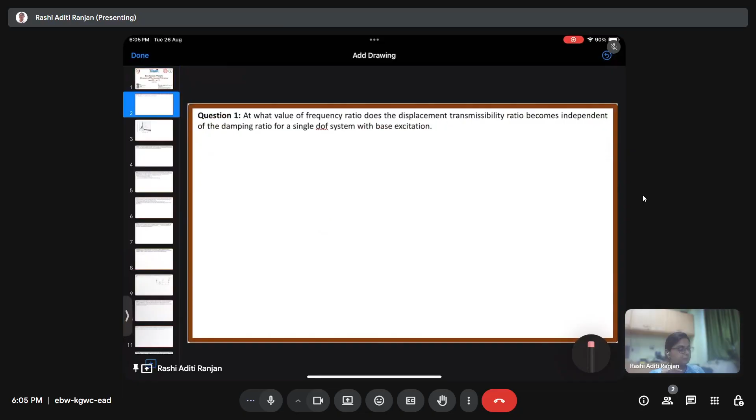Coming on to question number 1: at what value of frequency ratio does the displacement transmissibility ratio become independent of the damping ratio for a single degree of freedom system with base excitation?

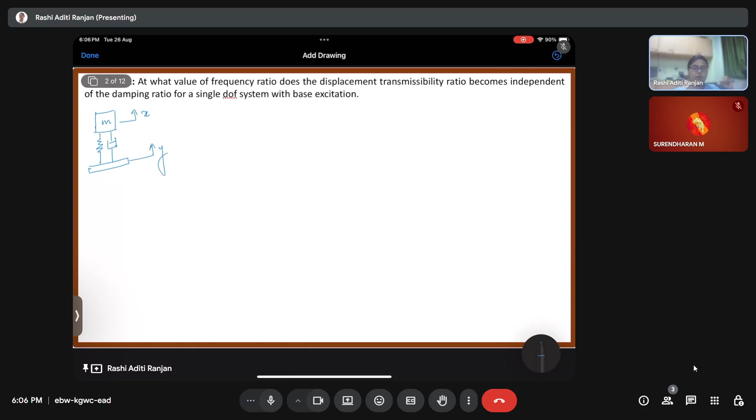The question is about a single degree of freedom system, which is a mass, spring, damper, and then this is the base. If this mass is having a displacement x, the base is having a displacement y, this is a single degree of freedom system with base excitation. The base y can be written as y naught sine of omega t. Let this be k and c.

So the question is about displacement transmissibility ratio, and when does it become independent of the damping ratio? Firstly, damping ratio eta is nothing but c by cc, and we have cc as twice the square root of mk.

Also we have omega, which is the excitation frequency, and omega n, which is the natural frequency of the system. We define the frequency ratio r as omega by omega n.

So the displacement transmissibility, which is x by y: x is such that if we write the solution x as x sine of omega t minus phi, then this ratio of x, the amplitude of the response of my mass, to y, the amplitude of the displacement excitation, is defined as x by y equals square root of [1 plus (2 eta r) squared] divided by [(1 minus r squared) squared plus (2 eta r) squared]. This is the equation for displacement transmissibility ratio.

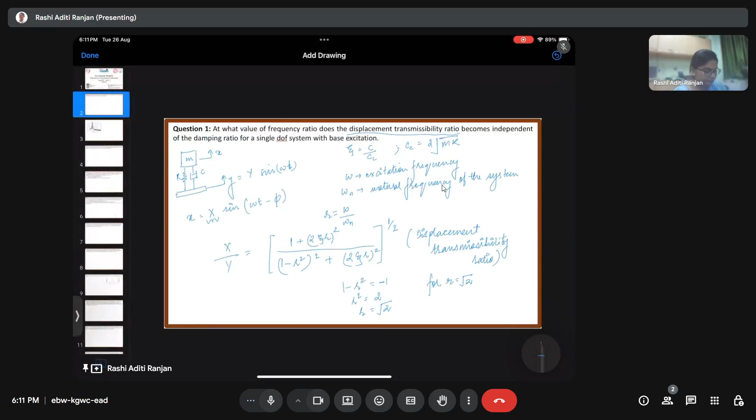For r is equals to under root 2, we have X by Y is equals to under root of 1 plus 2 eta under root 2 square, divided by 1 minus 2 whole square plus 2 eta under root 2 square. This will give us 1 plus 8 eta square divided by 1 plus 8 eta square, which gets cancelled, giving us X by Y is equals to 1.

More than that, what is important is that whatever be the value of eta, we are always going to get the value of transmissibility ratio as 1. It becomes independent of the value of eta, which is the damping ratio.

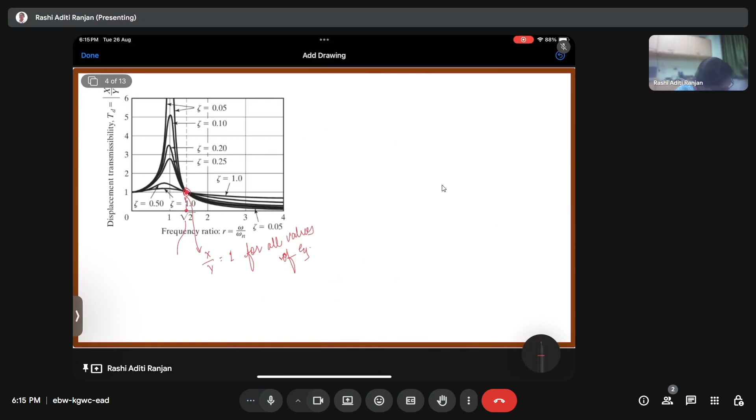Along with that, you can observe over here that at this point, what is happening? X by Y is equals to 1 for all values of eta, and this is happening at R is equals to under root 2. So you can see from the graph as well that this is true. For the frequency ratio under root 2, we get a constant value of displacement transmissibility, independent of the value of eta.

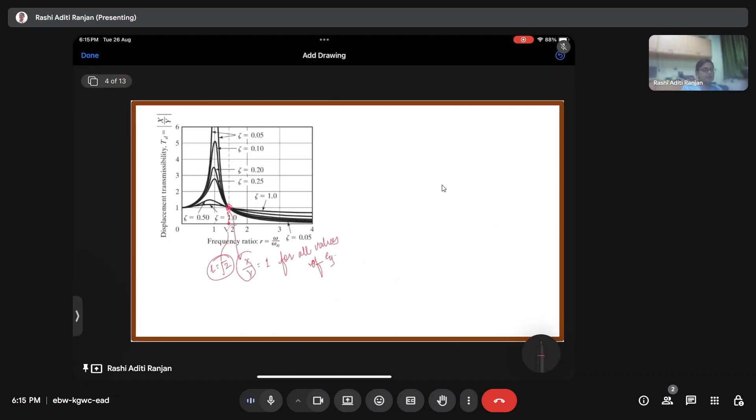So for the given question, which asks at what value of frequency ratio does the displacement transmissibility ratio become independent of the damping ratio for a single degree of freedom system with base excitation, the answer is omega by omega n, r is equals to under root 2.

Now coming on to question number 2. This again is a question about base excitation, where the base has some displacement excitation. It says a vehicle can be modeled as a single degree of freedom system with mass 1200 kg, stiffness 400 kilonewton per meter, and damping ratio 0.5. If the vehicle is traveling on a road with sinusoidal profile having amplitude of 0.05 meter and wavelength of 6 meter, with a speed of 20 km per hour, find the amplitude of vertical vibration of the vehicle.

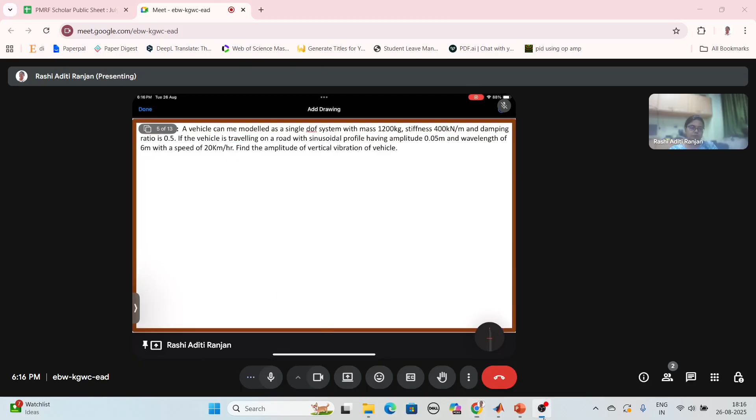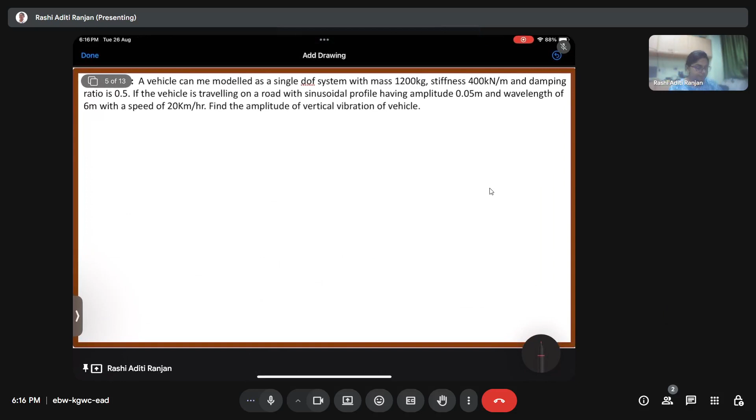So we have a vehicle such that this is the mass of the vehicle. It has a stiffness of 400 kilonewton per meter. There is a damper such that the damping ratio eta is equals to 0.5. And since it's a vehicle, it is going to have some tires. Let us say these are the tires.

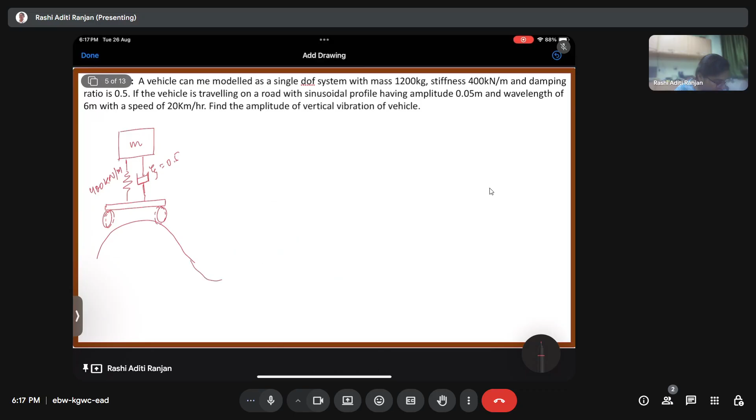And it is traveling on a road. The road is such that it is having a sinusoidal profile, and it has a wavelength lambda is equals to 6 meter. Now the forward speed of this vehicle is 20 kilometer per hour.

And we have to find the amplitude of vertical vibration. If let us say that this is something like x cos of omega t minus phi, then we have to find the value of this x.

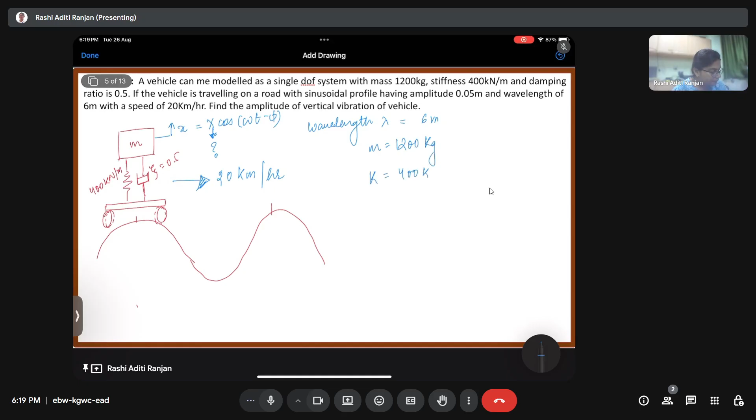Okay, we have to find the value of this. Now in the question, we have the mass, stiffness, damping ratio, forward speed, just 20 kilometer per hour. Then we have wavelength lambda. Okay, it is already written wavelength. So these are the specifications that we have.

So the first thing is, even if I want to apply the equation that we have for the displacement transmissibility, it is x by y is equals to square root of 1 plus 2 eta r whole square divided by 1 minus r square whole square plus 2 eta r whole square, to the power 1 by 2.

So I have the value of eta, but I need to find out the value of r, which is omega by omega n. So I don't have directly the values of omega and omega n, but I have the necessary data in order to find out the values of omega and omega n. So first we'll calculate omega n.

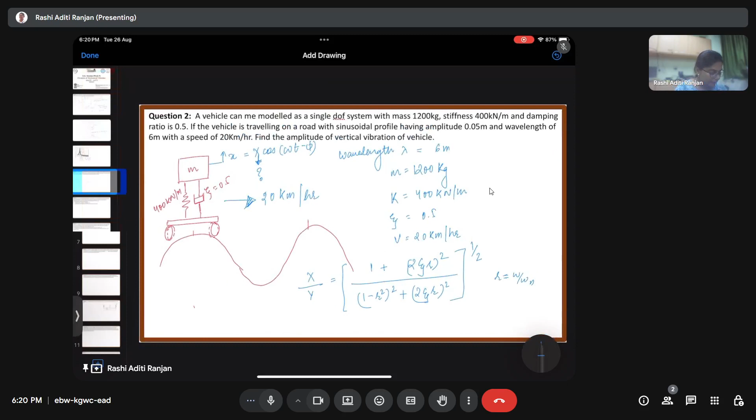So for a single degree of freedom system, we have the natural frequency defined as under root k by m, which is 400. It was 400 kilonewton. So 400 into 10 to the power 3 divided by mass, which was 1200. If you calculate this, it gives the value of omega n as 18.257 radians per second. This is the value of omega n, the natural frequency.

Now, if I see the value of omega, if I would have had the value of frequency f, I can find the value of omega by the equation 2 pi f. But how do I find the value of frequency f? In order to find the frequency, if I have the wavelength and I have the speed, if you remember when we study about waves, we have this equation f is equals to v by lambda, where v is the wave speed and lambda is the wavelength. So if I have these two values, I can find the value of f.

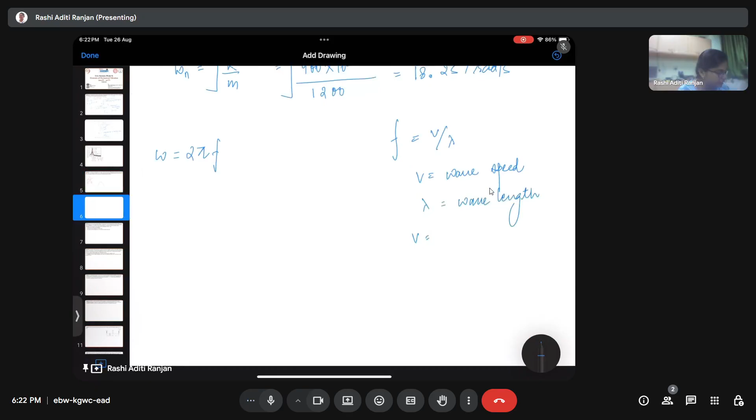Now over here, we don't have the wave speed, but instead we are going to use the vehicle speed, because the vehicle is traveling on that road which has a wavelength of lambda. So that speed of the vehicle is going to be used in order to find the value of frequency f. This v is given in kilometer per hour, so we can write v as 20 kilometer per hour. This can be written as 20 into 1000 meter, and then per hour is 60 into 60, 60 minutes 60 seconds.

So if I put this over here, 2 pi into 20000 divided by 3600 into 1 by 6. After doing all the calculations, this will turn out to be 5.81778 radians per second.

So we are going to get r as omega by omega n, which will be 5.81778 divided by 18.257. And when you calculate this, it will turn out to be 0.318653.

So when I put these values in the displacement transmissibility equation, I get x by y. I'll write the equation again: square root of 1 plus 2 eta r square divided by 1 minus r square whole square plus 2 eta r, to the power 1 by 2. It will turn out to be 1 plus 2 eta times r, which is 0.318653 squared, divided by 1 minus 0.318653 squared whole square plus 2 eta times 0.318653 squared, whole to the power 1 by 2.

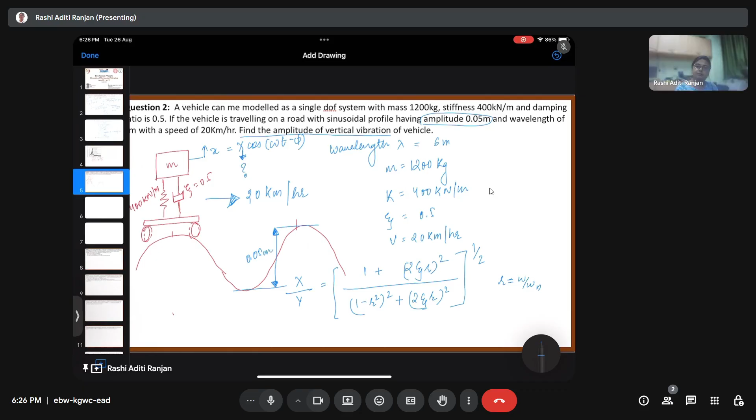However, in the question, it is asking to find the amplitude of vertical vibration. If you look over here, we have the amplitude of the sinusoidal profile as 0.05 meters. So we have this value as 0.05 meter, which is nothing but y. Now, since I have the ratio of x by y, I can simply write the value of x as 1.100964 into 0.05, which will give 0.055048 meters.

So this is the amplitude of vertical vibration of the vehicle. Okay.

So I hope this is clear. Coming on to question number 3.

Question number 3 says a heavy machine weighing 3000 Newton is supported on a resilient foundation. The static deflection of the foundation due to the weight of the machine is found to be 7.5 centimeter. So the weight of the machine is 3000 Newton, and we have delta static as 7.5 centimeter. Delta static is nothing but the static deflection of the foundation.

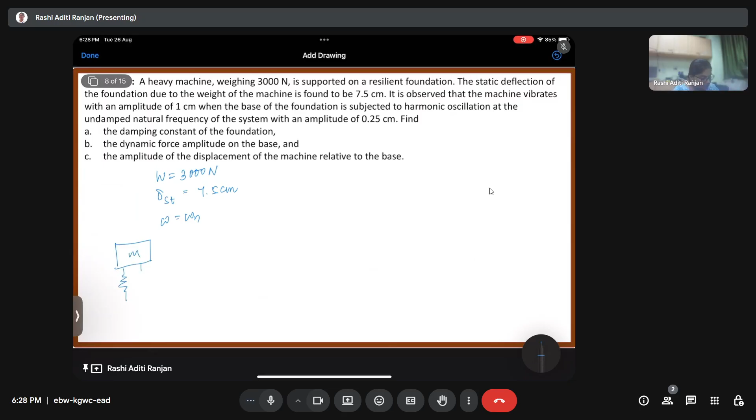Firstly, omega is equals to omega n. Let us say that this is a machine, m, then it is supported something like this to the base, with damper C and spring K. The base is oscillating as y sine of omega n t, because omega is equals to omega n, and we have the value of y as 0.25 centimeter.

And the machine is oscillating as x, which may be written as x sine of omega n t minus phi, where x is 1 centimeter. So firstly, we have taken the response of x as capital X sine of omega n t minus phi, because the mass is going to oscillate at the frequency at which the base is exciting, right?

Now the base is exciting at omega n. We have a damper, because of which the transient, which is due to the natural frequency of the system, is going to die out with time, and we are concentrating only on the steady state vibration of the system. So this is the case.

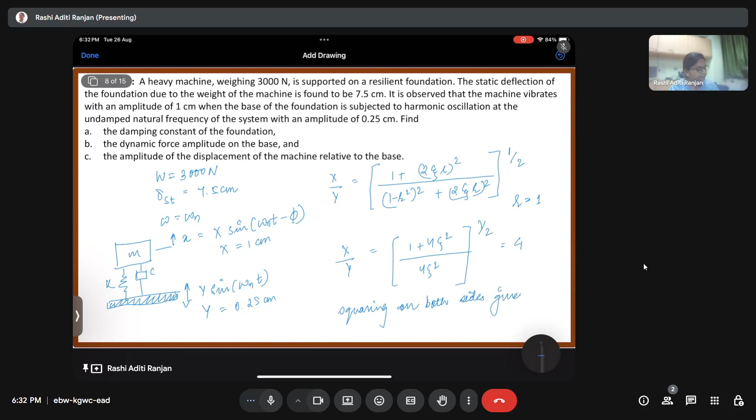Now if I put the values of capital X and capital Y, I get this as equal to 4. Squaring on both sides gives 1 plus 4 eta square divided by 4 eta square is equals to 4 into 4, which is 16. This implies 1 plus 4 eta square is equals to 64 eta square, or 60 eta square is equals to 1. This implies eta is equals to under root of 1 by 60. This value will turn out to be 0.1291.

This gives the value of the damping ratio. But in the question, we are supposed to find out the damping constant.

Now we know that C is equals to eta into Cc, and Cc is nothing but twice of under root of m into k, right? So we have twice of under root m, and we have a mass value of 3000 divided by 9.81, and then we have the stiffness K.

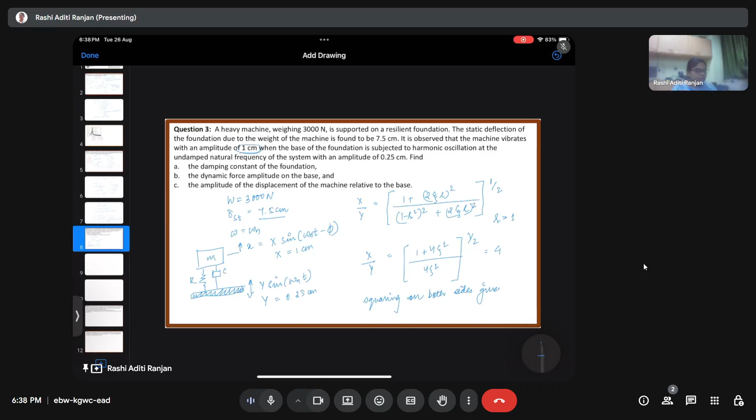So if we put these values over here, we get f of t as 40,000 into 1 by 100, which will turn out to be 400 Newton. This is the answer to part B.

So 400 Newton is the force that is being applied on the base. It is the force that is being applied on the base.

Now part C asks for the amplitude of the displacement of the machine relative to the base. So when we say relative to the base, we are talking about Z, which is nothing but X minus Y. So if we write an equation in terms of Z, which is the difference between X and Y, this is basically the relative value of X with respect to Y.

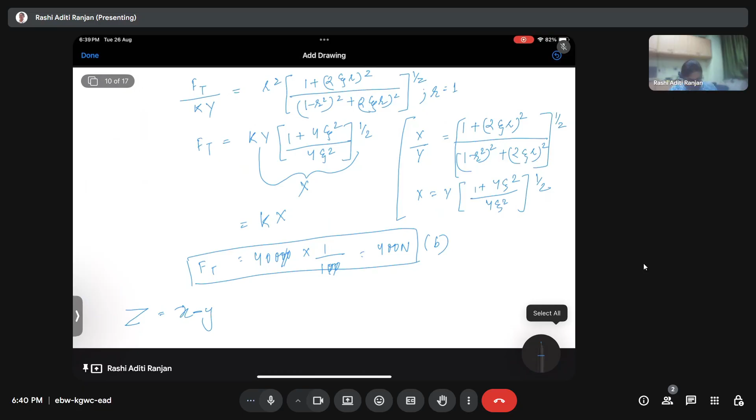Now if we use this and find the equation of motion and then use it to get a solution, we are again going to get a relation in the form of an equation such that Z equals capital Z, again amplitude. Capital Z equals y into r square, divided by the square root of 1 minus r square whole square plus 2 eta r whole square, right?

Since r equals 1, what do we get? We get z equals y divided by twice of eta.

The value of y we already have in the question, which is given as 0.25 centimeters. So 0.25 divided by 2 into 0.1291 into 100. This will give the value 0.00968 meter, and this is the answer to part C. Okay, I hope this is clear.

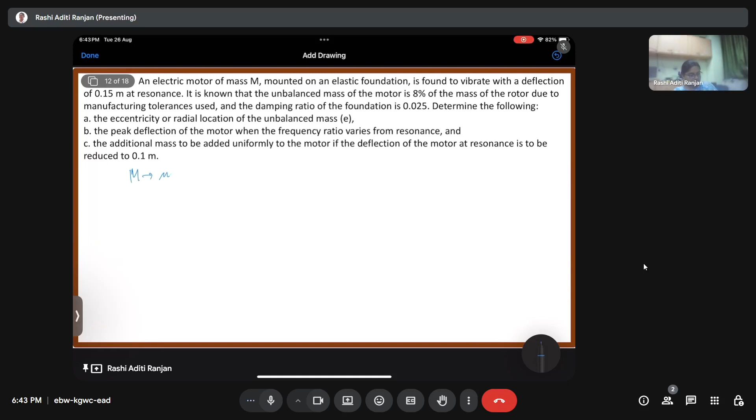See, our system is something like we have the motor mass as m. It is mounted on an elastic foundation, and deflection is 0.15 meter at resonance. Okay, deflection of what? Deflection of the motor mass, right? It is found out to be 0.15. So we have x as 0.15 meter. It is known that the unbalanced mass of the rotor of the motor is 8% of the mass of the rotor.

M is 8% of rotor, which is equal to 0.08 of M, right? The damping ratio of the foundation is 0.025. First, we have to find the eccentricity or radial location of the unbalanced mass.

So, if you remember, for eccentric mass, the transmissibility ratio was given in the form such that mx by me was equal to r square divided by the square root of (1 minus r square) whole square plus (2 eta r) whole square.

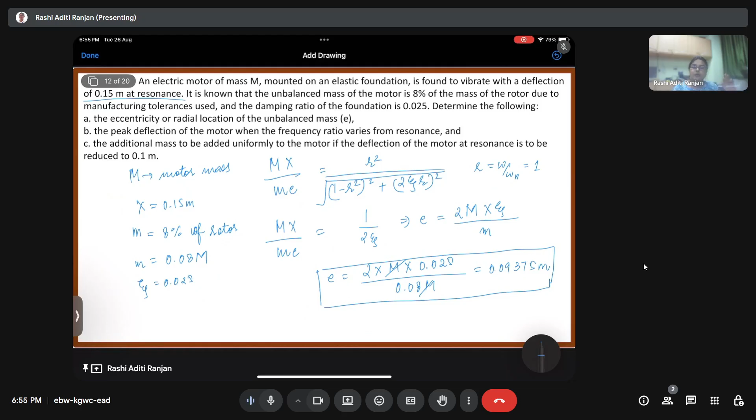Coming on to the third part of the question, which asks for the additional mass to be added uniformly to the motor if the deflection of the motor at resonance is to be reduced to 0.1 meter. Currently the deflection at resonance of the motor is 0.15 meter. But now the question says if I want it to be 0.1 meter, what should I do?

Adding another slide: we have the equation of the form mx by me is 1 by 2 eta, for r equals 1, that is the resonance. Now we have to replace m by m plus ma, which is the additional mass. So the question asks what should this additional mass be such that capital X changes from 0.15 meters to 0.1 meter. We are going to put all these values and find m plus ma.

So we'll have the new equation as m plus ma into 0.1 by 0.08 m into e is going to be 1 by 2 into 0.025, which is going to be 20. The value of eta was 0.025.

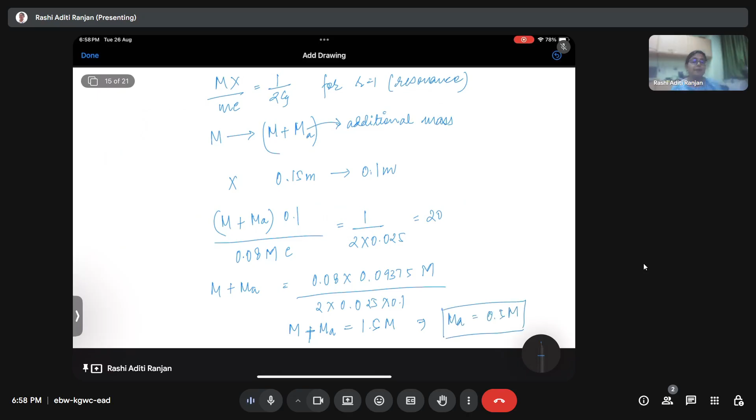So m plus ma will be equal to 0.08 into 0.09375 divided by 2 into 0.025 into 0.1 m. After doing all the calculation, m plus ma is going to be 1.5 m, and so ma is going to be 0.5 of m. So almost 50% extra of capital M, which is the mass of the motor, should be added to the motor so as to get a deflection amplitude of 0.1.

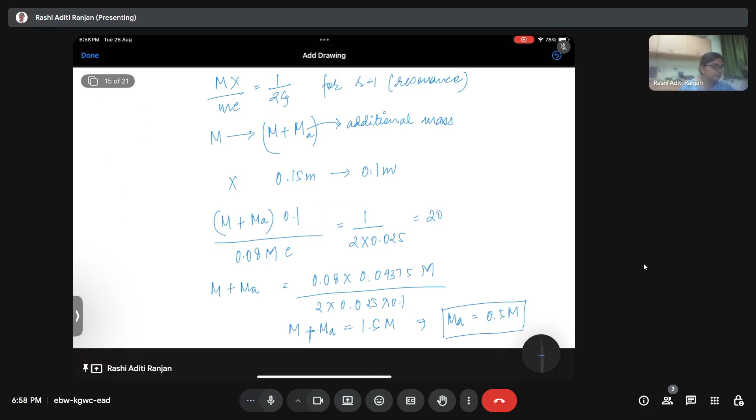Now coming on to question number 5, which says that for a spring mass system, the mass is 10 kg and the spring stiffness is 4000 Newton per meter, vibrating on a horizontal surface. A coefficient of friction is 0.12. When subjected to a harmonic force of amplitude 98 Newton and a frequency of 2 Hertz, the mass is found to vibrate with an amplitude that we have to find out. Then we have to find the limit of amplitude of the force to get a real value of amplitude of vibration.

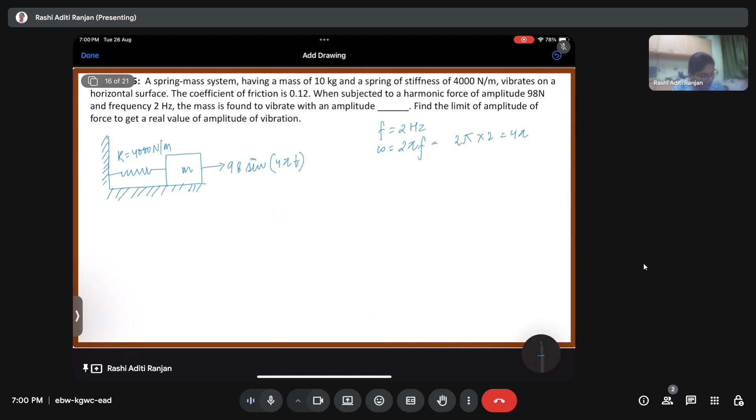So the question is something like: you have a mass m, and then there's a spring which has a stiffness of 4000 Newton per meter, and it is having a forcing of 98 sine of omega t, where F is 2 Hertz. So omega is 2 pi F, which is 2 pi into 2, equals 4 pi. And here there is some friction such that mu equals 0.12. So we have to find out, if this mass is oscillating, what is the amplitude of oscillation of the mass?

So firstly, for this kind of system, what relation do we have? Up till now we were dealing with a system wherein forcing was there along with viscous damping. Here we have coulomb damping. There has been a derivation of the transmissibility ratio for coulomb damping, and it turns out that x is given in terms of f naught by k into 1 minus 4 mu n by pi f naught whole square, divided by 1 minus r square, whole to the power 1 by 2. Mu is the coefficient of friction, capital N is the normal force, and F naught is the forcing.

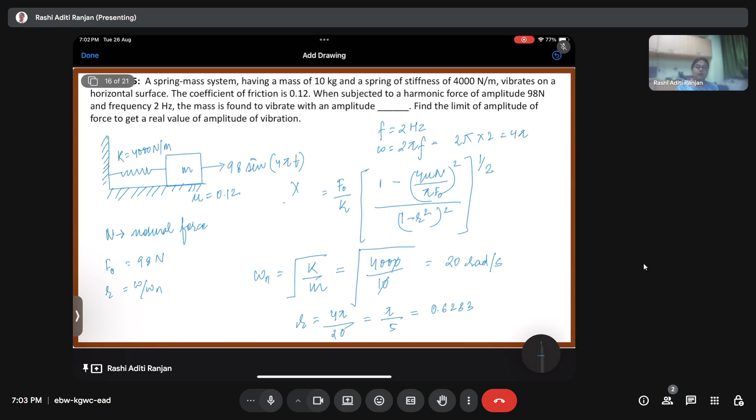Okay, now if I put all these values, I get capital X as 98 by 4000 into 1 minus 4 into 0.12 into capital N. Capital N is the normal force. We know the mass is 10 kgs, so N is going to be 10 into 9.81, which is 98.1.

98.1 divided by pi into 98 to the power 2, divided by 1 minus 0.6283 whole square, to the power 1 by 2. After doing all the calculation, which you can repeat, I have done all the calculation. X will turn out to be nearly equal to 0.04 meters.

Okay, so this is going to be the amplitude of the vibration of the mass, considering the Coulomb damping.

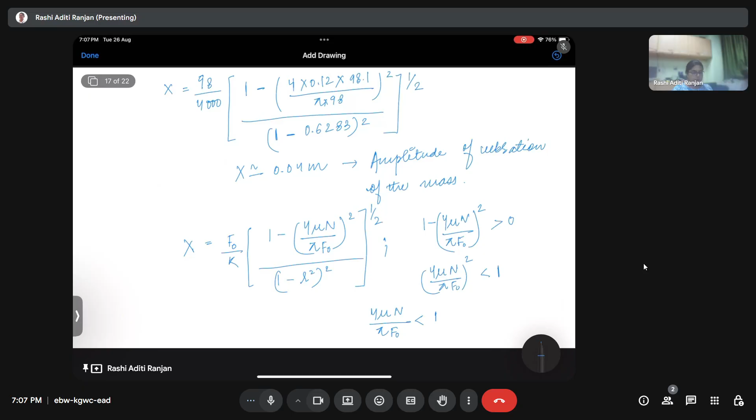Just a second. No, it should be less than only. It should be less than 1. If this whole value is less than 1, then definitely its square is going to have a value less than 1. If it is greater than 1, it is never going to be less than 1. So it should be less than 1.

Now if I take it like 4 mu n by pi should be less than F naught. Okay, so this gives us a relation: F naught should be greater than 4 mu n by pi. If I put the values, 4, 0.12 into 98.1 divided by pi, I get the value of F naught. It should be greater than 14.988 Newton.

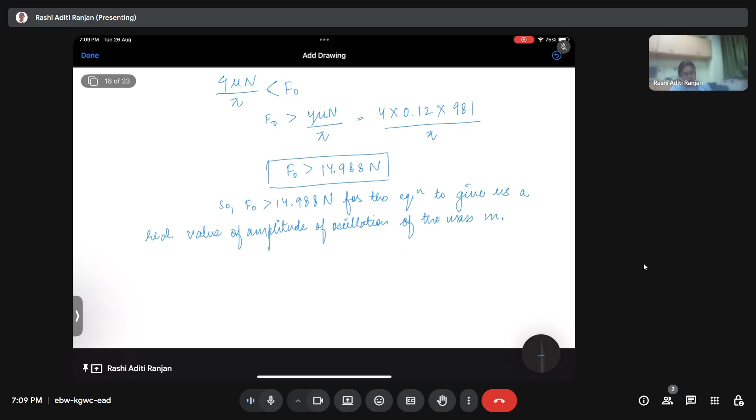So F naught should be greater than 14.988 Newton for the equation to give us a real value of amplitude of oscillation of the mass m. Okay, so this gives us a limit of what should be the amplitude of the forcing that is being applied on the mass. I hope this is clear.

So now we'll come on to question number 6. It says that an exhaust fan of mass 380 kg is supported on a spring with negligible damping, and the resulting static deflection is found to be 45 mm. If the fan has a rotating unbalance of 0.15 kg meter, find A, the amplitude of vibration at 1750 rpm, and the force transmitted to the ground at this speed. So this is again a question related to rotating unbalance.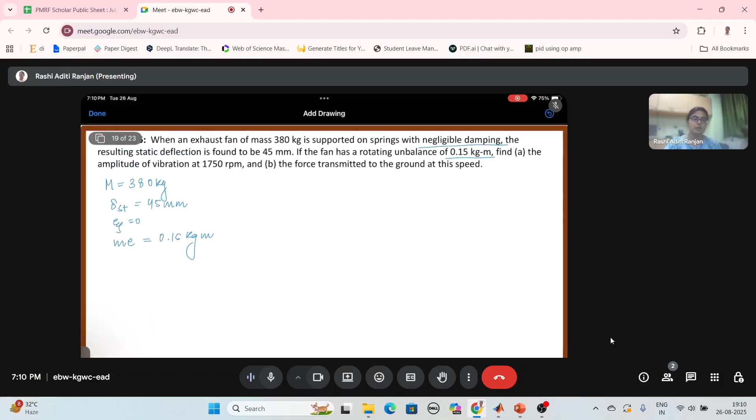So we have the exhaust fan mass as 380 kg, the static deflection as 45 mm, and eta equals 0 since it says we have negligible damping. We have a rotating unbalance of 0.15 kg meter, which means m into E is given as 0.15 kg meter. Now on the basis of these values, we need to find what is asked in the question. First, we have to find the amplitude of vibration, which can be found using the equation that we have.

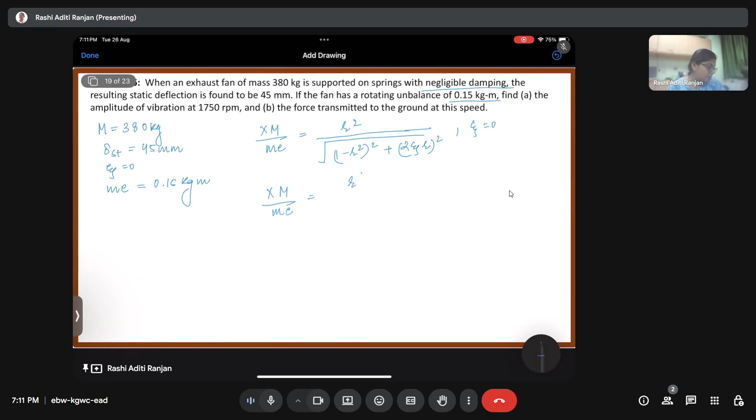See, we have xm by me as r square divided by under root of 1 minus r square whole square plus 2 eta r whole square. Since eta is already equal to 0, we have xm by me as r square divided by under root of 1 minus r square whole square.

Over here, you can have a question that why am I even bothering to write under root and then square? We know that under root of a square is going to be what? A. But for the time being, if I am using this, I'm assuming that a is greater than 0. But this equation is true for all the a's, whether it is positive or negative. If I directly write under root of a square as a, it will be true only for the positive values of a. Or what I can do is write it as mod of a. That will be a correct mathematical form, because no matter whether a is positive or negative, under root of a square is always going to be positive. So we can use a mod over here also, but for now, I am just leaving it like this.

So we need to find out R, which is omega by omega n. Omega we already have because we have 1750 rpm, which we need to convert. So omega is nothing but 2 pi into 1750 divided by 60 because we have rotations per minute. We'll convert it into per second by dividing it with 60. This will come out to be 183.26 radian per second.

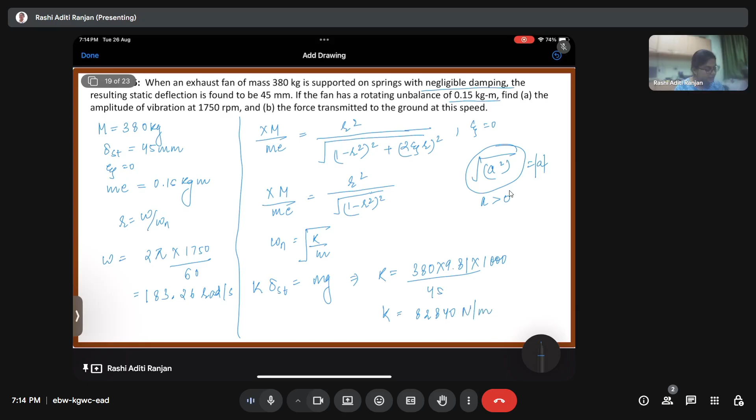So using these values, actually you can maybe use the ratio of delta ST and G to find the value of natural frequency. Since we have something like this, K into delta static is equals to mg. So K by m is equals to G by delta static. So omega n, which is equals to under root of K by m, it is going to be equal to nothing but under root of G by delta static. So this will turn out to be 9.81 into 1000 divided by 45. This will also be equal to 82,840 divided by 380, and will give a value of 14.7648 radians per second.

So now we can find the ratio as omega by omega n, which will be 183.26 divided by 14.7648, equals 12.412.

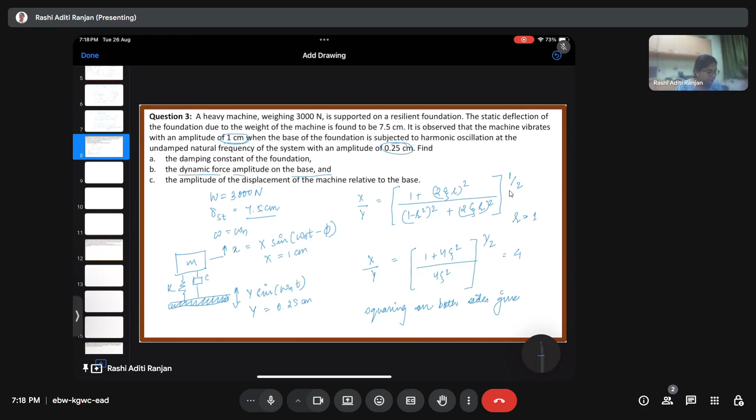Coming on to the second part of the question, which is talking about, we need to find out the force transmitted to the ground at this speed. If you remember what we did earlier about force transmitted, which question was it? Here, yeah, dynamic force amplitude on the base. And we had the relation come out as kx.

Similar to this, for the rotating unbalance as well, the force transmitted is going to be what? K into x, right? See, actually the force transmitted should be K into x plus C into x dot. But if you look at C into x dot, we have the damping as 0. So the force only will get transmitted because of the presence of the spring, because of its stiffness.

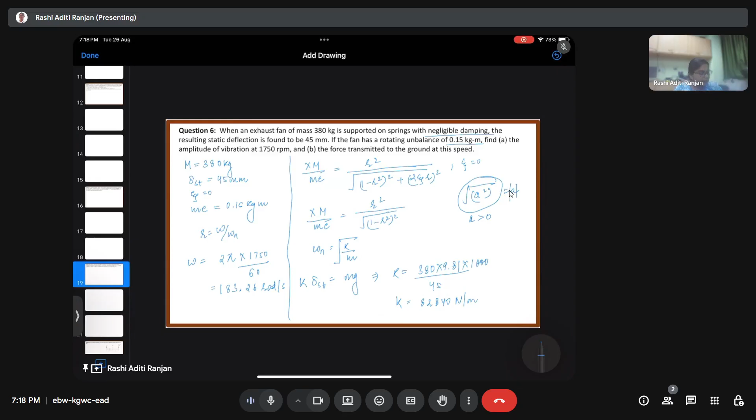In that case, we can simply write force transmitted as what? K into X, which is nothing but 82,840 into 3.9732 into 10 to the power minus 4. This will give us a value of 32.9140 Newton.

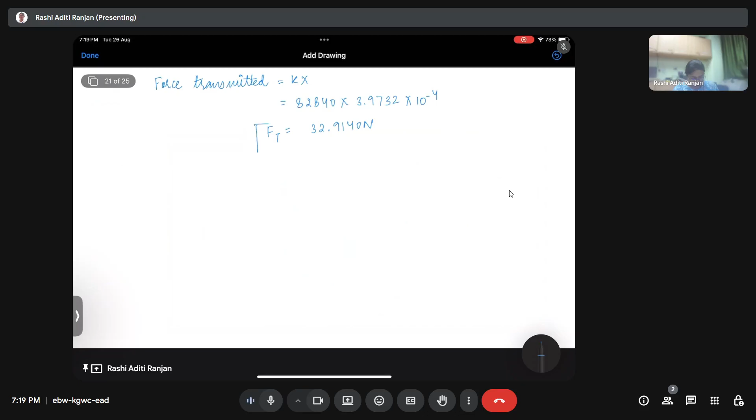This is the force transmitted, essentially the answer to part B of the question. This was the answer to part A. So for this question, we had only two things to find: the amplitude of vibration and the force transmitted.

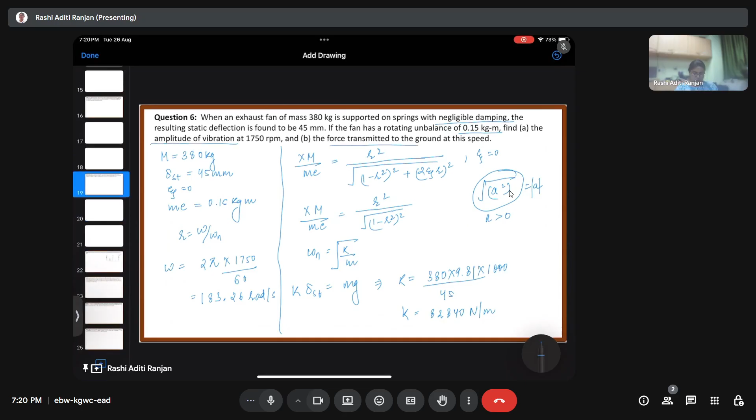Now we'll move on to question number 7. We need to find the equation of motion and the steady state angular amplitude of the bar. This kind of question we already did when we had the week 2 or week 3 live session, where we had to find the equation of motion of a system like this, using either energy balance or by equating the forces and moments to get the equation of motion.

In this case, we have a similar question. The only difference is that point P of the spring has a displacement vibration, given in the form x naught sine of omega t. In the other questions we've solved till now, this point P was fixed. This time it is moving with x naught sine of omega t.

What's important to note is that for a spring, if one end has a movement and the other end is also not fixed but has a movement, then the force applied by the spring will depend on the relative displacement between the two points.

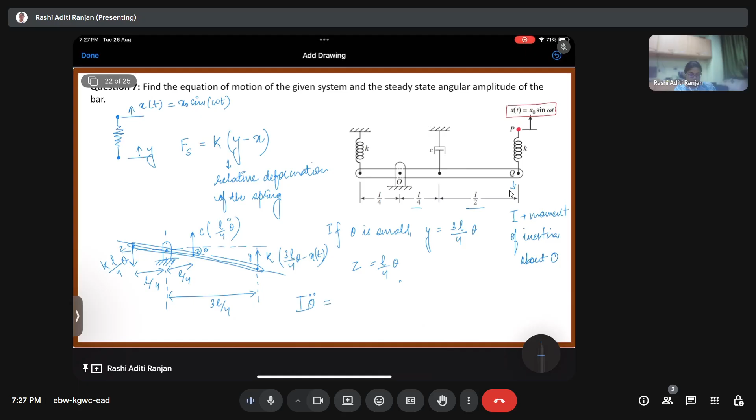Let us assume that for this rod, we have I as the moment of inertia about O. So if I write I theta double dot equals the summation of all the moments about O, what am I going to write? I'm going to write I theta double dot equals C...

Over here, we have the motion in this direction. The rotation is in this direction, right? Corresponding to this rotation, the inertia is going to be in this direction.

But if I look at what the forces are acting, we have the moments in the counterclockwise direction. So the moments are going to have a negative value, right? So we'll have minus.

Firstly considering this one, which is K L by 4 into theta, K L by 4 theta into L by 4. Then we have minus C L by 4 theta dot into L by 4, C L by 4 theta dot into L by 4.

Minus K L by 4 theta, K L by 4, 3K L by 4 theta minus X of t into 3L by 4, right? It should be 3L by 4. And yeah, these three are going to contribute as the moments. For now, we are considering no mass.

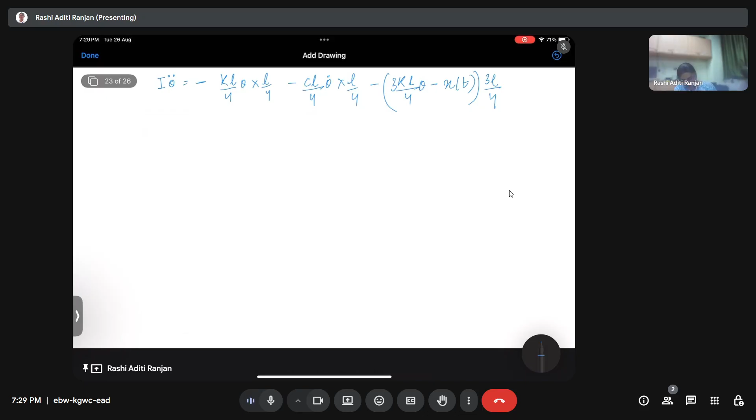Okay, so what is this going to give us? I theta double dot is equals to minus k L square theta by 16 minus c L square theta dot by 16 minus 9k L square by 16 into theta, plus 3L by 4 into x of t.

These both, the first and third terms, can be combined to give us 10 by 16, which is going to be 5 by 8. So minus 5 k L square theta by 8 minus c L square theta dot by 16 plus 3L by 4 x naught sine of omega t.

This will give us I theta double dot plus 5 k L square by 8 into theta plus c L square by 16 into theta dot is equals to 3L by 4 x naught sine of omega t. Okay, there should be a k over here also, right? K. Yes. So this is going to be our equation of motion.

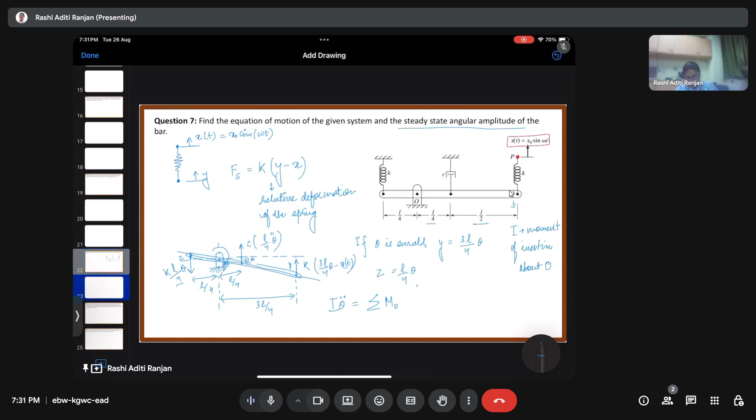So if we use this analogy, and as asked in the question, the steady state angular amplitude, we can use the formula for a single degree of freedom system where we had x is equals to f naught by k minus m omega square whole square plus c square omega square to the power 1 by 2, we can get the expression for the steady state amplitude.

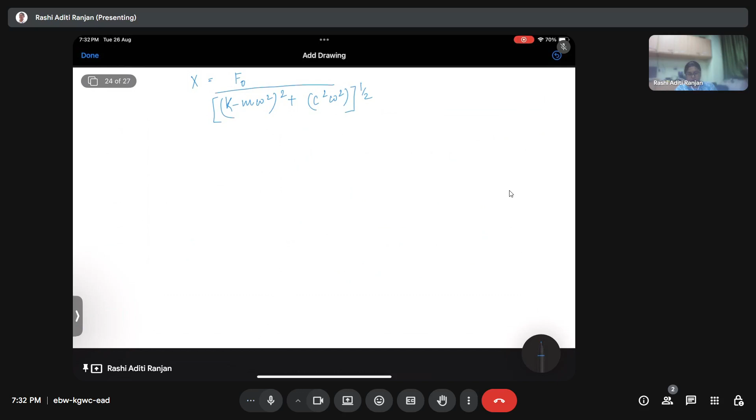Right? We know the value of k, m, omega. We just need to relate this, like we can relate m is equals to I, not exactly equal to, but we can just relate m with I, and then we can relate k with 5k L square by 8, c with c L square by 16, and f with 3 KL x naught by 4.

We can just put these things in this equation and we can get the relation of x, which is the steady state amplitude.

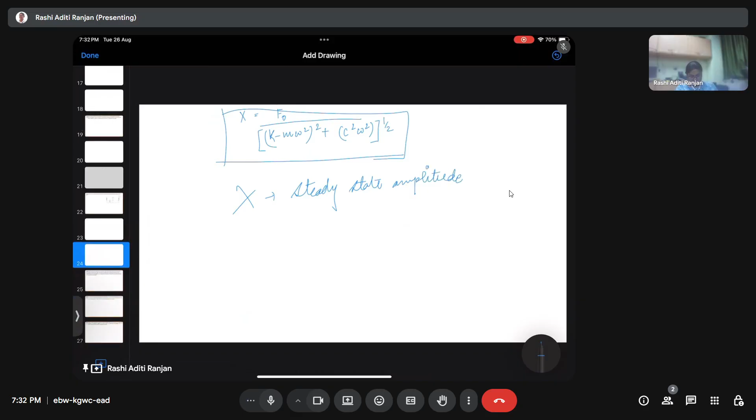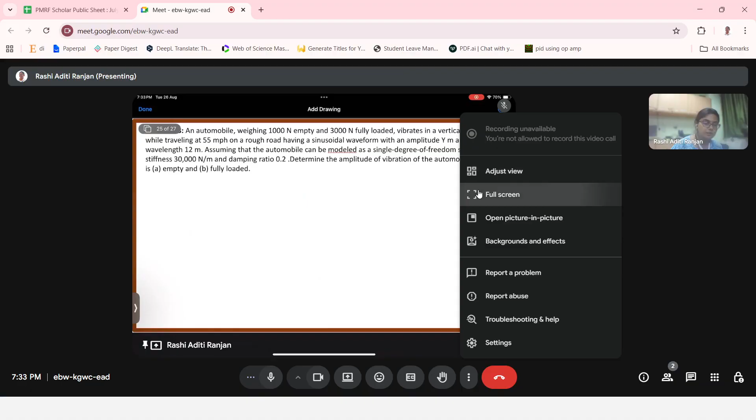Coming on to question number 8. Question number 8 says that an automobile weighing 1000 Newton empty and 3000 Newton fully loaded vibrates in vertical direction while traveling at 55 miles per hour on a rough road having a sinusoidal waveform with an amplitude y meter and a wavelength 12 meter.

Assuming that the automobile can be modeled as a single degree of freedom system with stiffness 30,000 Newton per meter and damping ratio 0.2, determine the amplitude of vibration of the automobile when it is empty and when it is fully loaded. Okay, so...

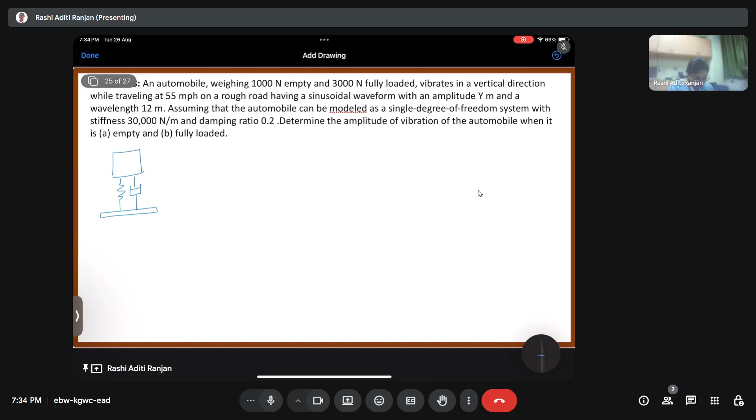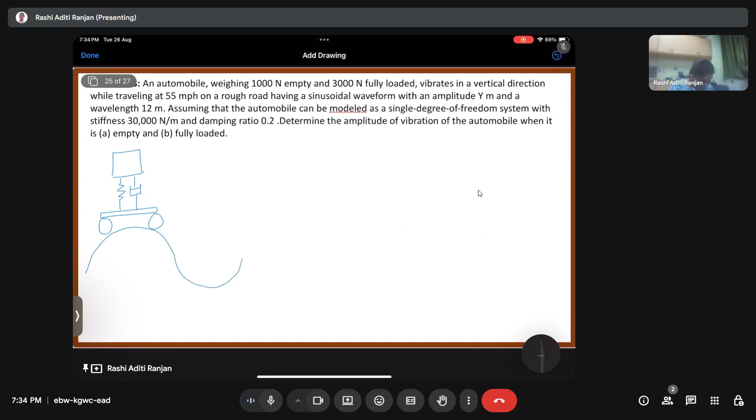What do we have? We have an automobile which is having a stiffness and damping, and it is attached to a base which is having wheels, and it is going through a road which is having a sinusoidal waveform, something like this.

Stiffness, damping, and mass. So we have K as 30,000 Newton per meter, and we have zeta as 0.2. Plus we have mass as 1000 for empty and 3000 for fully loaded.

Right. Now for this road we have this as y, it's given in terms of y, and we have a wavelength, lambda is equals to 12 meters. Apart from that, we have the vehicle speed in the forward direction as 55 miles per hour.

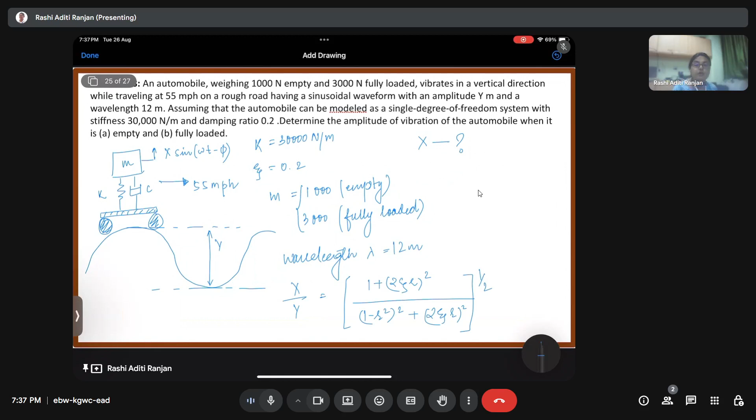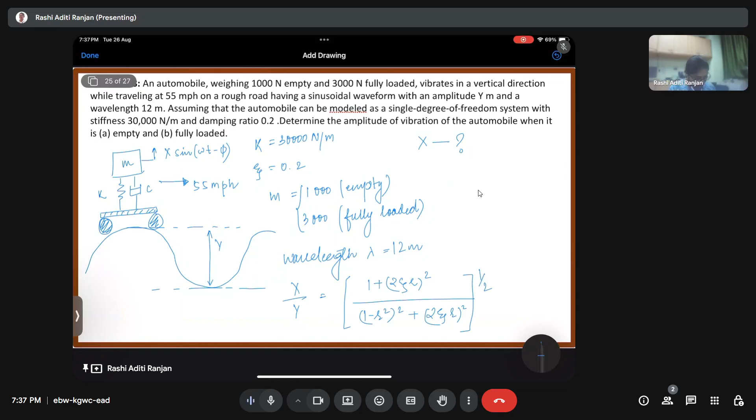In this case, firstly we need to find the value of omega, which is going to be the same for both cases, but omega n is going to change for empty and fully loaded vehicle. In order to find omega, we have omega as 2 pi f, and f was v by lambda, where v was the speed and lambda was the wavelength.

So v is given as 55 miles per hour. We need to change it to meters per second to get omega in radians per second. Omega is going to be 2 pi into 55 miles, converted into kilometers by multiplying with 1.60934 into 1000 divided by 3600, into 1 by 12, because 12 is the wavelength. This gives a value of omega as 12.8738 radians per second.

Now for case A, which is empty automobile, we have omega n as under root of k by m. The value of k is 30,000 divided by 1000 into 9.81. This gives a value of 17.1552. From this we get the value of R as 12.8738 divided by 17.1552, which is 0.7504.

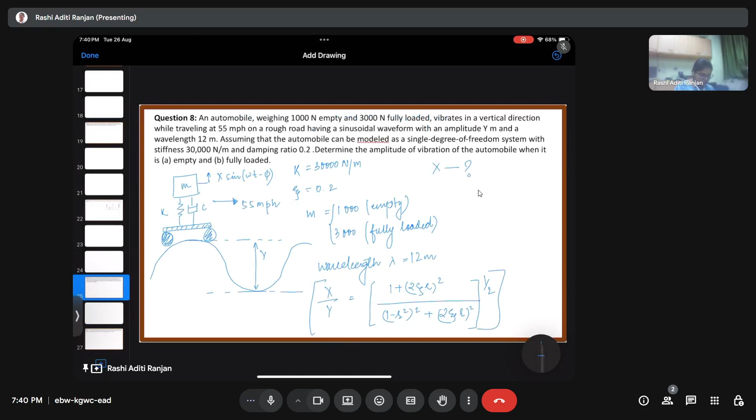Now if I use this in the displacement transmissibility equation, we get x equals y into 1 plus 2 zeta, which is 0.2, into r, which is 0.7504, whole square divided by 1 minus 0.7504 square whole square plus 2 into 0.2 into 0.7504 whole square, this to the power 1 by 2.

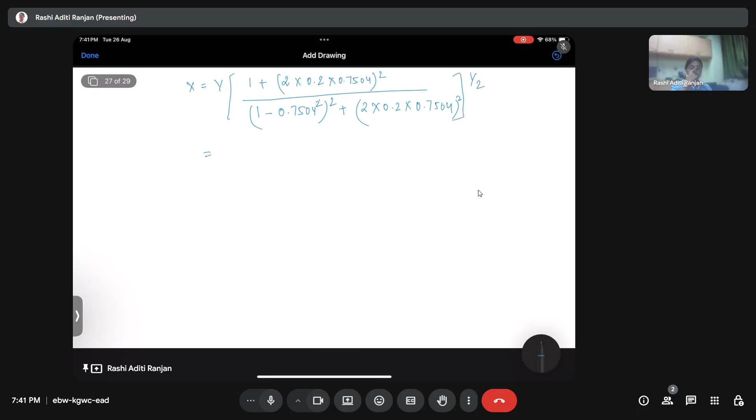This turns out to be y into under root of 1 plus 0.3002 square divided by 0.4369 square plus 0.3002 square. X will turn out to be 1.9696y. This is the answer for case A, which is for an empty automobile.

Now for a fully loaded automobile, omega n is going to be under root of k by 3000 into 9.81. This value is going to be 9.9045 radians per second.

If you find the value of r, it will come out to be 12.8738 divided by 9.9045, which is 1.2998.

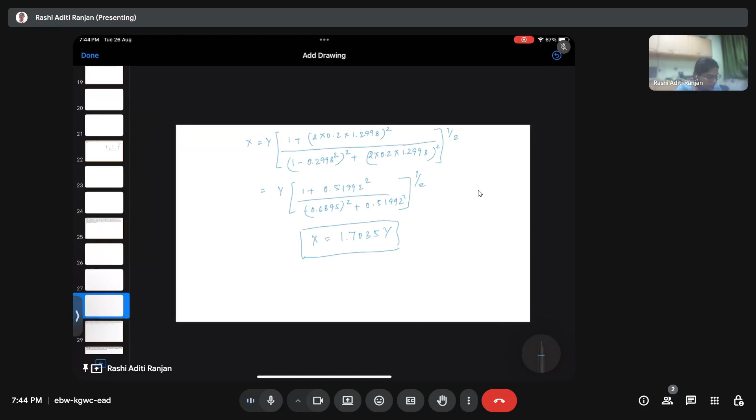So now we'll come to question number 9. The base of a damped spring mass system with mass 25 kg, K 2500 Newton per meter, is subjected to a harmonic excitation of y naught sine of omega t. The amplitude of the mass is found to be 0.05 meter when the base is excited at the natural frequency of the system with y naught equals 0.01 meter. Determine the damping constant of the system.

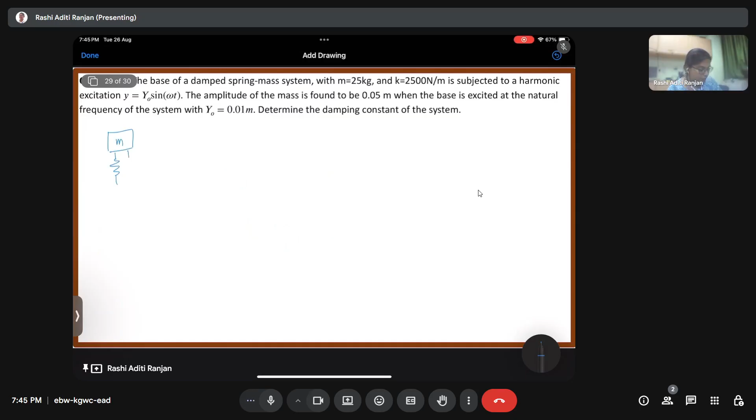Again we have a base excited system. We have mass attached with a spring and a dashpot to a base, such that the base has an excitation y and the mass is vibrating at a response x, not an excitation.

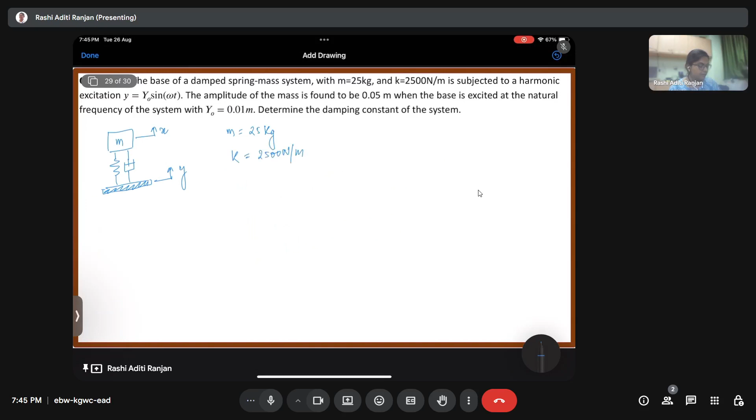We have mass equals 25 kg, K as 2500 Newton per meter, and Y as Y naught sine of omega t, where the value of Y naught is already given as 0.01 meters. Apart from that, we also know that M has a motion x as x naught sine of omega t minus phi.

The value of x naught is 0.05 meters.

Okay, we need to determine the damping constant of the system. The first thing to keep in mind is that the natural frequency of the system is actually used for the excitation, so we have omega as omega n. The form of the displacement transmissibility in terms of eta and r should not be used here. The reason being, if we use it, what are we going to get?

If you remember, for the first question we did, if the ratio of frequency was equal to 0 or under root of 2, we had the displacement transmissibility as 1, and in that case it was not depending upon eta. Over here, we don't have under root 2 or 0. We actually have omega by omega n equal to 1. We have the value of r as 1.

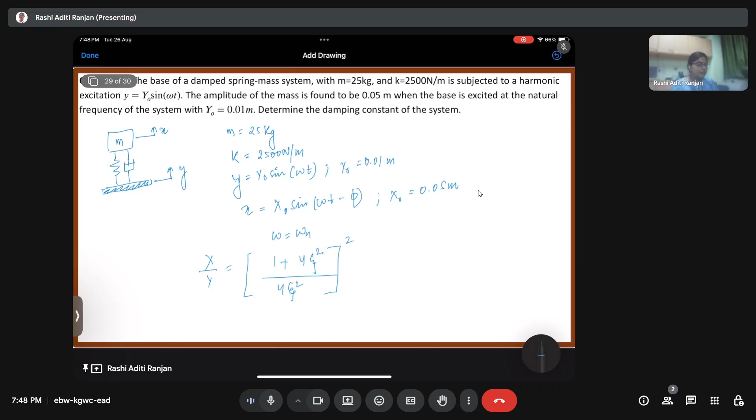Now to find the damping constant, first I'll evaluate the value of eta from this equation, then use the relation of Cc, which is twice of under root mk. I'll find the value of Cc and then multiply it. But what if I want to use only one equation? Then there is the basic form of this equation, from which we derive this part.

That basic form is nothing but x by y equals k square plus c square omega square, divided by the under root of k minus m omega square plus c square omega square. This is the basic form of the equation, and this equation only is used in order to get the equation in the non-dimensionalized form, in terms of eta and r.

For this question, we already have the value such that omega equals omega n, and we need to find the value of x and y, and then find the value of c. So if I put those values in this equation, what am I going to get? First, x is how much? X is 0.05.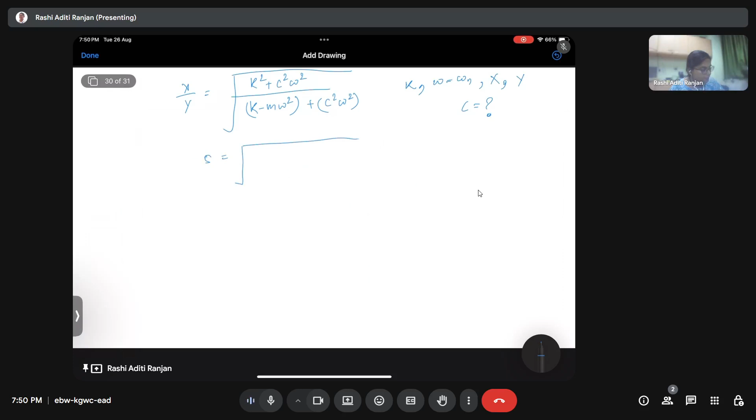So 5 we are going to get over here. It is going to be equal to k square, which is 2500 square, plus c square, and then we need to find omega n, which is under root of k by m, and m is 25. So omega n is going to be 10 radians per second.

So we'll have c square into 100, because we have omega square over here, divided by 2500 minus m omega square, which is 100 into 25. Anyways, this is going to be equal to 0, plus c square into 100. This will go to 0 definitely, because omega is obtained by using this equation: k minus m omega square is going to be 0 for omega equals omega n.

So squaring on both sides, we have 25 equals 2500 square plus 100 c square, divided by 100 c square. This will give us 2500 c square equals 2500 square minus 100 c square, right? So this is going to give us 2400 c square equals 625 into 10 to the power 4, or c square is going to be 2604.167.

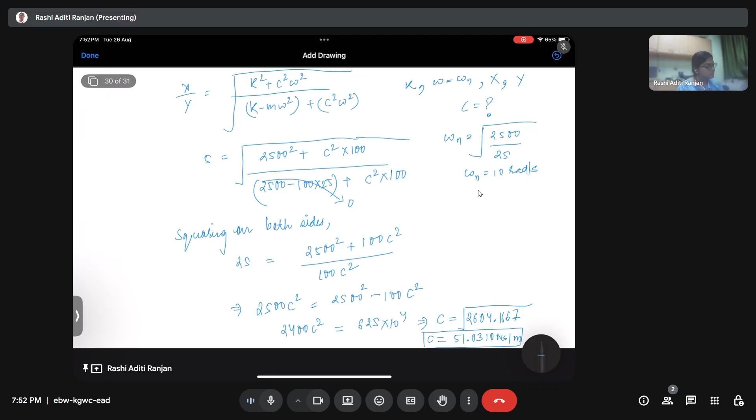Okay, and if I apply the under root, c is equals to this, the value of c will come out to be 51.0310 Newton second per meter. So this is going to be the value of the damping constant.

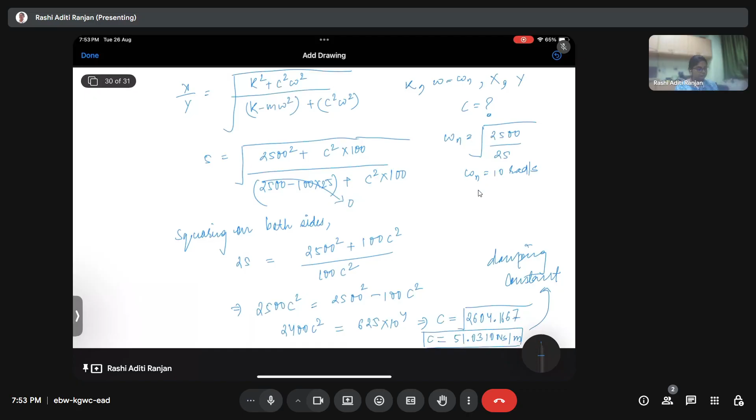Now the last question for the live session. A spring mass system is subjected to Coulomb damping, which means friction. When a harmonic force of amplitude 120 Newton and a frequency of 2.5173268 Hertz is applied, the system is found to oscillate with an amplitude of 75 mm. Determine the coefficient of dry friction if mass is 2 kg and K is 2100 Newton per meter.

So this is a very simple, equation based question. So if you remember the equation, you can simply work on this question.

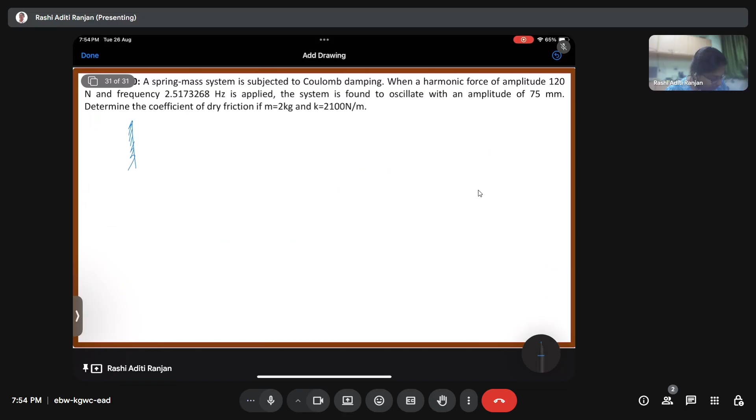So for this question, we have a support, then we have a mass and a spring. There's no dashpot because we are talking about Coulomb damping, right? The dashpot simply means viscous damping, but here we are talking about Coulomb damping. So there's going to be a friction, which is going to have a mu, which is the coefficient of friction, which we have to find out - coefficient of friction.

Mass is 2 kg, K is 2100 Newton per meter. Okay, and then there is a forcing. There is a harmonic forcing F of time, where F of t is of the form F naught sine of omega t, with F naught as 120 Newton, omega as 2 pi into 2.5173268 radians per second.

Okay, then we have the system found to oscillate with an amplitude of 75 mm. So for the system, if the response x of t is written as x sine of omega t minus phi, capital X is given as 75 mm. Over here, what we need to do is find out the value of mu, which is the coefficient of friction.

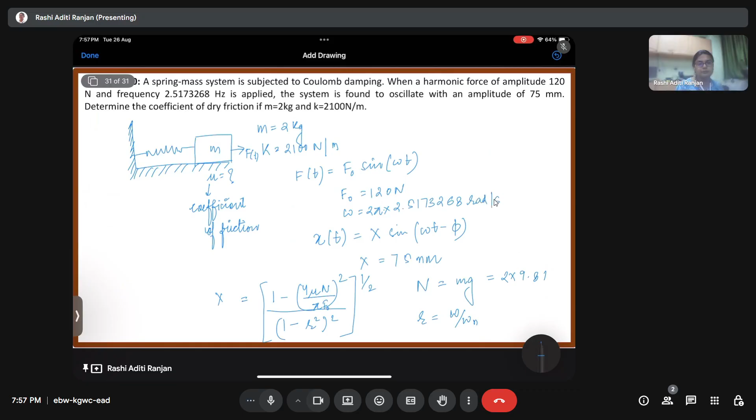So omega, we know, we need to find out omega n, which we can simply do by using the equation omega n is equal to square root of k by m, which is 2100 divided by 2. This will turn out to be 32.403703 radians per second.

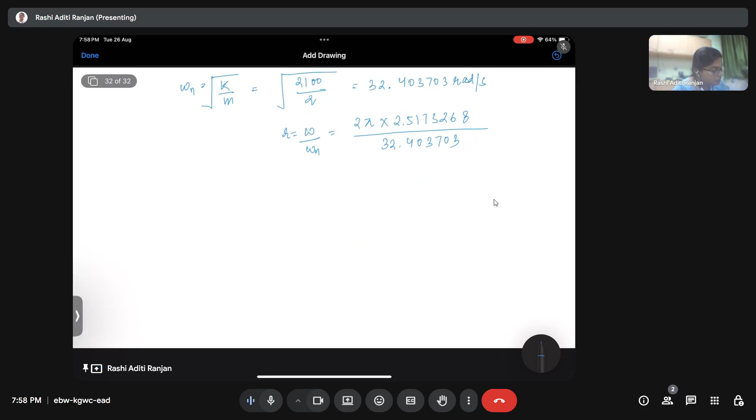So r, which is omega by omega n, will turn out to be 2 pi into 2.5173268, divided by 32.403703. After doing all the calculation, this will come out as 0.488119.

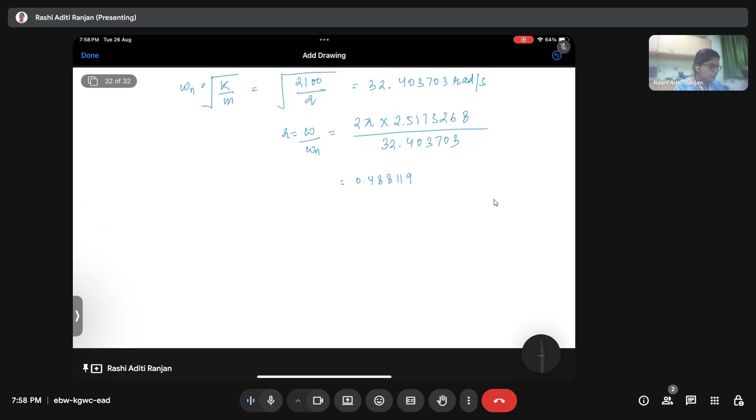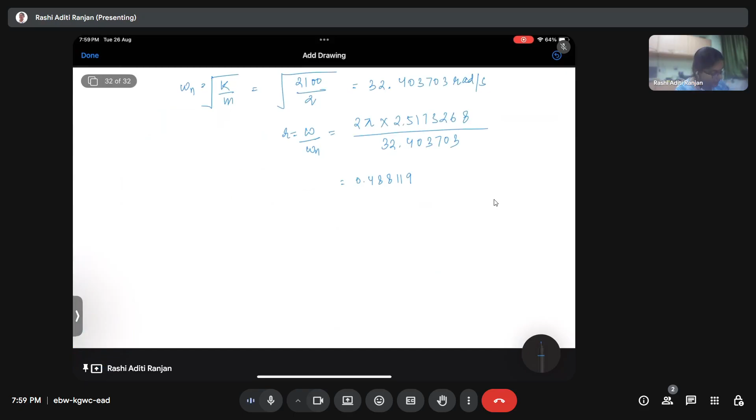Okay, now if I put all these values, what am I going to get? See, we have 75 mm, so it will be 75 divided by 1000, equal to F naught, which is 120, by K, which is 2100, into square root of 1 minus (4 mu into 19.62 divided by pi into 120) squared, divided by 1 minus 0.488119 squared, whole to the power of 1 by 2.

So there is only one unknown variable over here, which is mu. Everything else is just a numeric value. So after doing all the calculation, I'll write the final value.

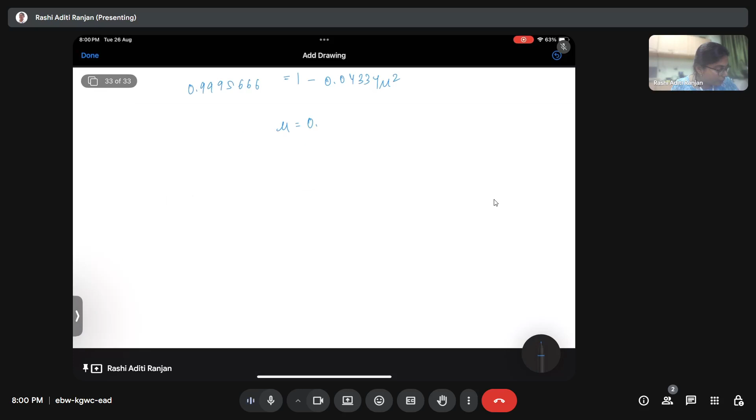So it will turn out to be something of the form: 1.3125 is equal to square root of 1 minus (0.04334 mu divided by 0.5802473), whole to the power of 1 by 2, which may be further rewritten as 0.9995666 is 1 minus 0.04334 mu squared, and finally mu will turn out to be 0.1, which is the coefficient of friction.

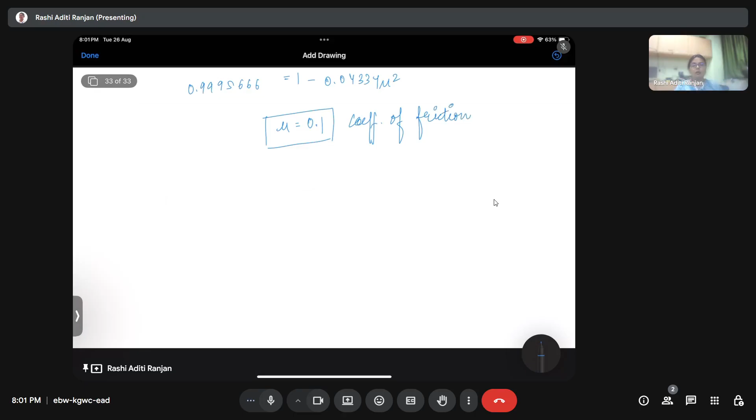Okay, so I hope this question was clear. So this was it about all the questions for the week 5 live session. We have gone through 10 questions which were mostly related to base excitation, and for the system when it is having some kind of excitation or harmonic excitation with Coulomb damping. We did some questions related to unbalanced rotors and how we are going to deal with those kinds of problems. So I hope this was clear and it will help you to solve the assignment problems.